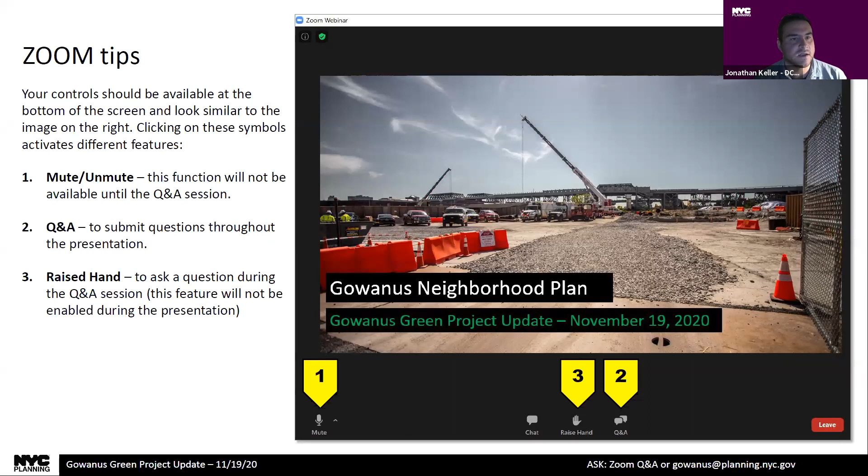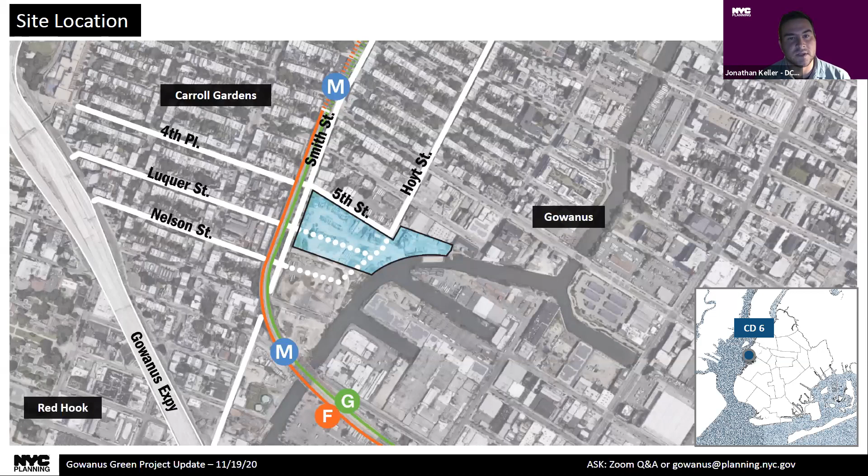Great, thank you, Councilmember Lander and Mike and CB6. So to get right into it, tonight we are here to talk to you about Gowanus Green, also known colloquially as Public Place. Tonight we will go over how the city has been planning for Gowanus Green, and then the development team will present on the specifics behind developing the site, including site plans and massing, project resiliency and sustainability, the proposed affordable housing plan, and some timing and next steps.

First up from the agency team is Mark McIntyre from the Office of Environmental Remediation, who will walk us through the history of contamination on the site and remediation updates. He'll be followed by colleagues at Housing Preservation and Development to talk about the project history, and they will then hand it back to me to talk through the plan components and the zoning proposal that we are putting forth that would facilitate this project.

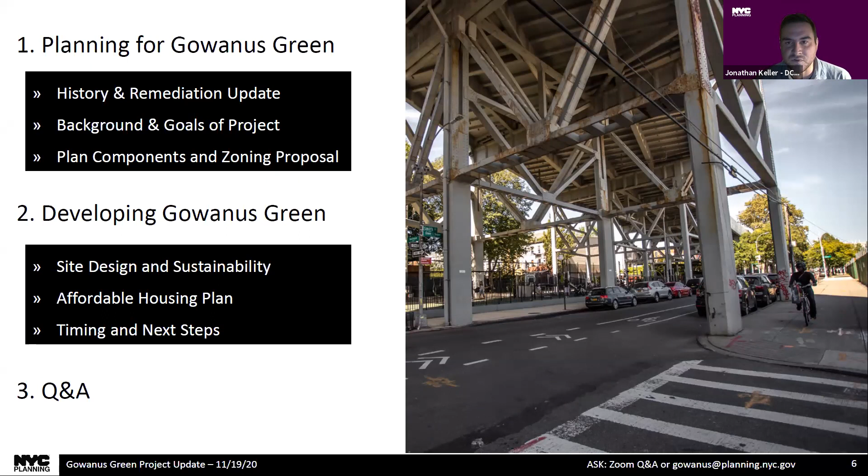Great. Thank you, Jonathan. Good evening. Our office runs the City Land Cleanup Program. Just as a bit of background, the Gowanus Canal and the path to its cleanup has understandably received a lot of attention over the past 10 years. Tonight, I want to spend a few minutes on the cleanup of the land, that is Public Place.

For decades, this city property has been seriously contaminated, and the contamination of the land has spread to the canal, causing the canal to be placed on the National Superfund list. But after 20 years of study and design, the land is now being cleaned up. This is a historic moment. After 160 years, this land will now be restored and made available for public and community use.

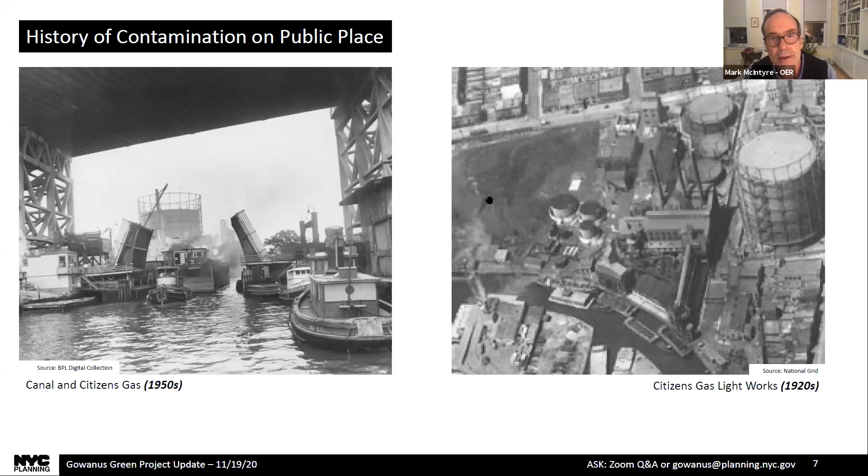A word on the remedy: it is a containment remedy. It will remove contamination to a depth of 22 feet. It will place a cover across the site and erect a barrier wall to keep coal tar from reaching the canal. This remedy protects public health and the environment by removing contamination and by boxing in contamination remaining beneath the site, preventing it from spreading further. This is a standard approach for remedies at former gas plant sites. Next slide, please.

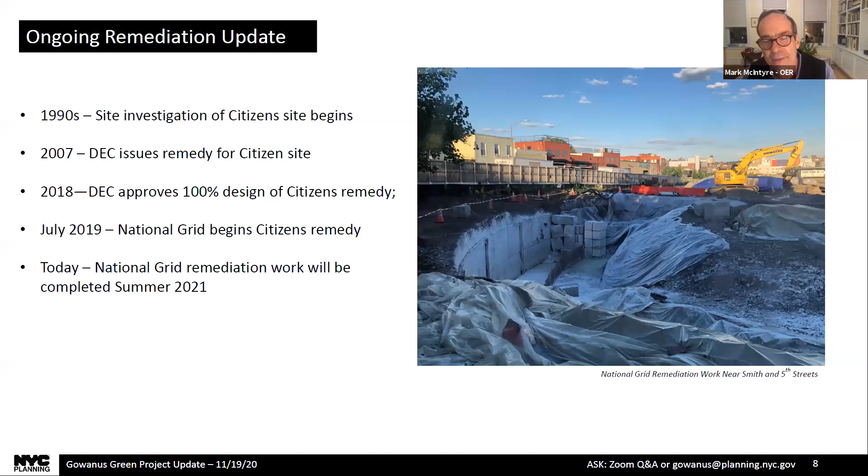So here are the remedy elements. A barrier wall, 880 feet long. It's absolutely critical to the success of the remedy. It keeps coal tar from reaching the canal, protecting the canal remedy for the long term.

There are recovery wells located uphill of the barrier wall to capture coal tar that mounds up against it. There'll be excavation of coal tar down at 22 feet. To date, 70,000 tons of contaminated soil have been removed, and removal will continue until the remedy is completed next summer.

There will be a cover built across the entire site. This will prevent any exposure to people who come to Public Place in the future. And there will be, importantly, what's known as a site management plan. This requires National Grid to maintain and monitor the barrier wall, the recovery wells, and the site cover to ensure their long-term effectiveness.

The state DEC will also use the site management plan to direct any further remediation of shallow soil at Public Place that may be necessary before the developer, Gowanus Green, builds on the site.

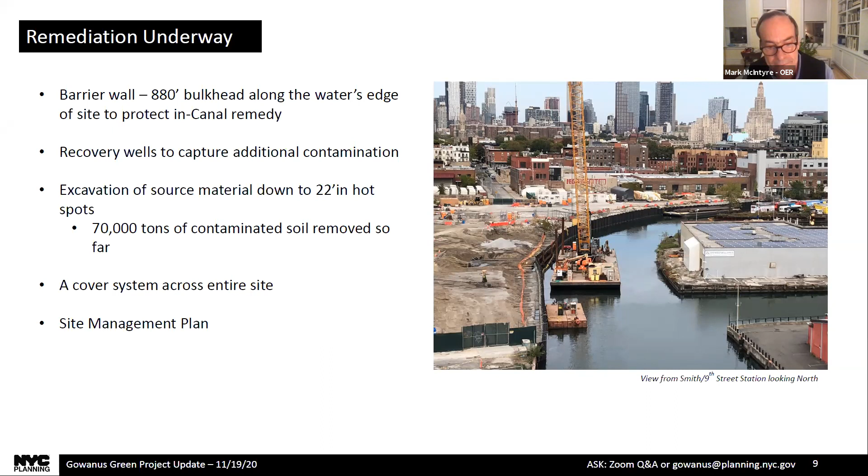So upon the rezoning of the Gowanus, the city will place environmental requirements on Public Place. This will require Gowanus Green to study the extent of soil contamination beneath the buildings it proposes to build. If the study shows further remediation is necessary, Gowanus Green must perform this work to the satisfaction of the city and the state before it can pull building permits.

To prepare for this work, Gowanus Green has asked the state DEC to make it a party to the brownfield cleanup agreement under which National Grid is now remediating the site.

After National Grid finishes constructing the remedy, Gowanus Green will study soil conditions at Public Place to satisfy the city environmental requirements. If the study shows further remediation is necessary, such as installation of a vapor control system beneath the buildings, Gowanus Green will have to complete this work to the satisfaction of the state and city before it can build and occupy buildings on Public Place.

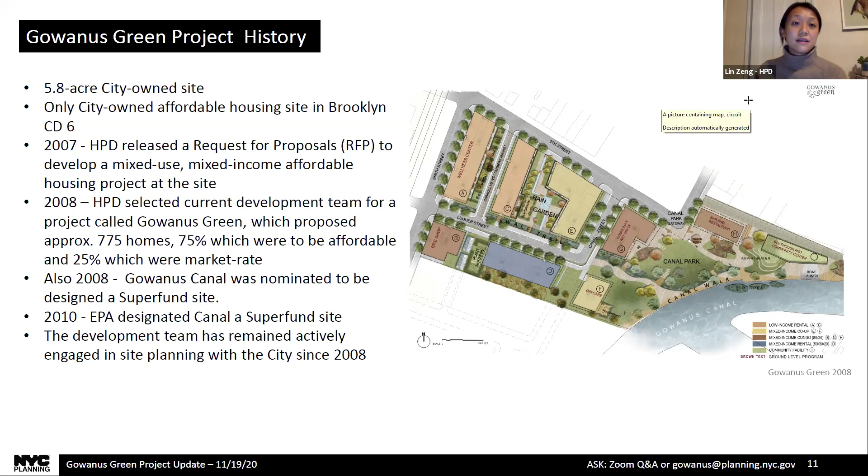The current plan also allocates space for a future 500-seat public school, which was not present in the original plan. Lastly, responding to the existing condition, this project will also include significant green infrastructure that will deal with stormwater management in a sustainable way.

Creating a sustainable, resilient, environmentally healthy community; supporting cleanup and remediation; creating and preserving affordable housing for all people, but especially those at the lowest income brackets; building a network of parks and open spaces in Gowanus; creating an inclusive neighborhood that is integrated and accessible for all; and supporting community and economic development for a thriving neighborhood.

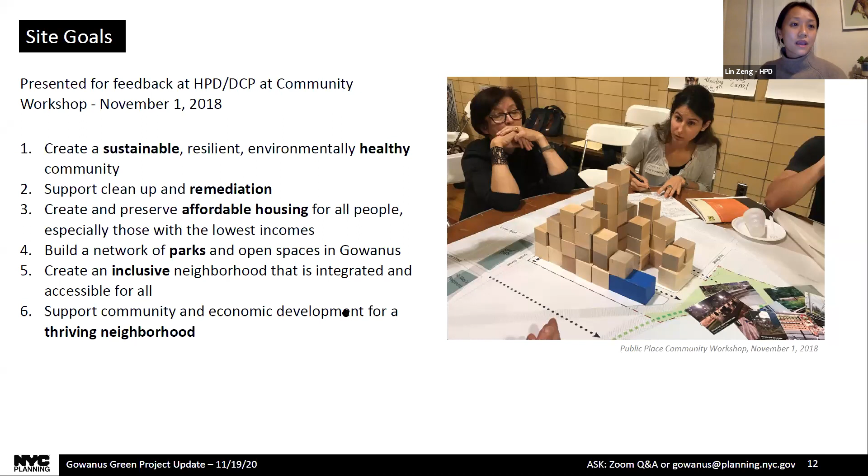So I'm going to shift gears a little bit and talk about affordable housing in general. What is affordable housing? This is often the question we get when we go to any community in the city with affordable housing projects. Affordable for whom? It is relative. Affordability is definitely relative, but the definition we're using is that affordable housing is when a household spends no more than a third of its income on rent and utilities.

Here I'm going to talk about AMI, another term that gets used quite a bit when explaining affordable housing. It stands for area median income, and it's something the federal government determines annually for different regions. The AMI number acts as an indicator based on household size and what income category you fall into. In 2020, the area median income, or AMI, for a family of 3 in the New York metro area is a little bit over $100,000. You might say that is pretty high - it is very high and actually rather high for households who are looking for and need affordable housing and can't afford it.

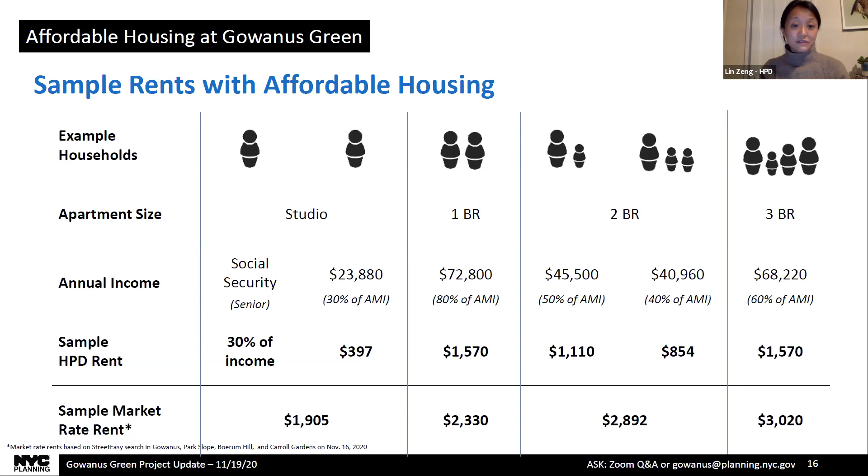Next slide. So the development team will discuss the proposed buildings at Gowanus Green in a lot more detail than I am right now. But I do want to end with a summary of the city's affordable housing goals. In addition to the mapped park, the allocation of space for a new public school, and new infrastructure, this project, Gowanus Green, will be 100% affordable.

It will serve New Yorkers with a wide range of incomes and needs. At least half of the rental housing will be dedicated to extremely low and very low income households—like that family of 3 making about $50,000 a year. At least 15% will also be dedicated to formerly homeless households. And we are also looking to include buildings dedicated to low-income seniors, as well as supportive housing with supportive services on site, and affordable home ownership as well.

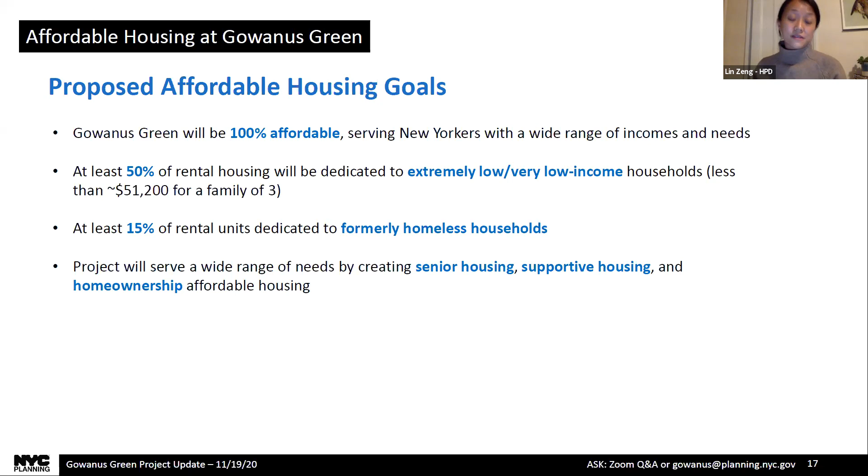So with that, I think I'm turning it over to Jonathan at DCP.

Yes, thank you. Back to me. I'm going to run through, hopefully very quickly, some slides about our plan components and the zoning proposal, since it is pretty important to how the development project will be facilitated. First, as there are probably a lot of people who are new to the entire process and study.

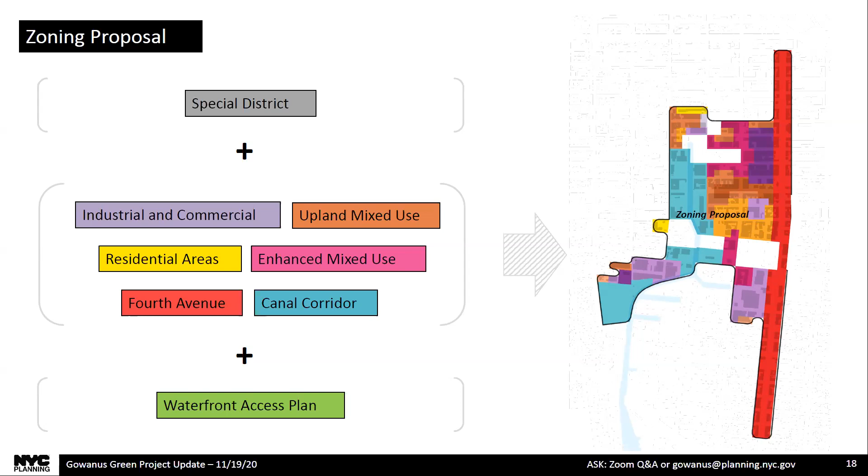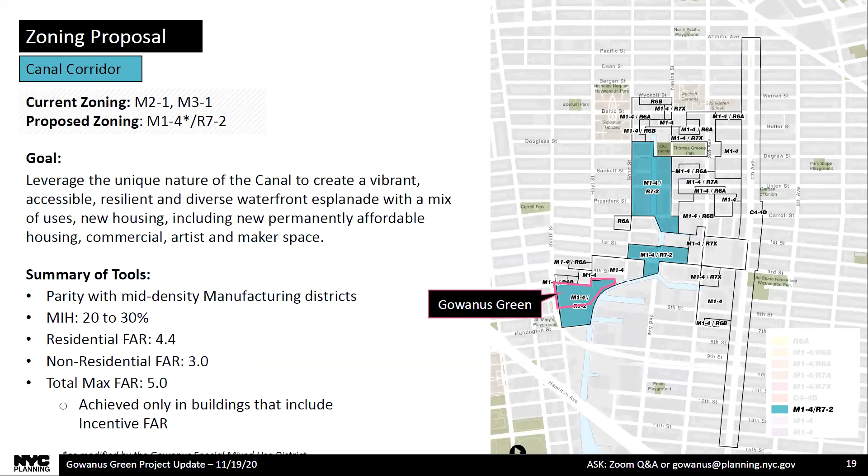We have been looking at an 80 block area for appropriate changes to zoning and land use. We've studied particularly and proposed specific zoning along the canal that responds to its unique conditions, to foster a vibrant, accessible, resilient, and active waterfront with a mix of uses—new housing, permanently affordable housing, and commercial artist and makerspace. A centerpiece of this vision, created over years of process and engagement with the community, is a waterfront access plan that will provide public open space along the canal.

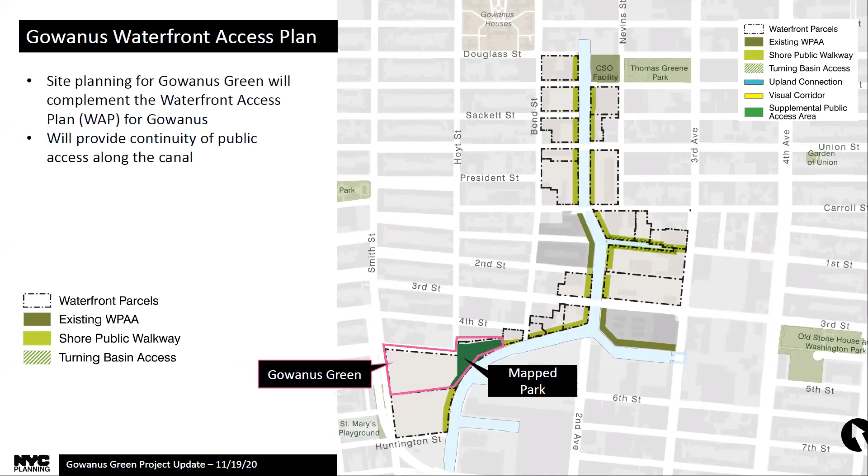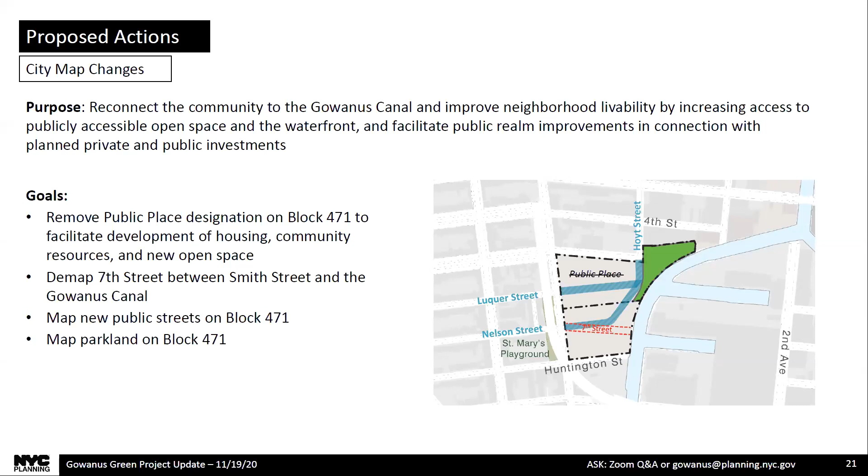And a key part of that waterfront access plan is Gowanus Green. As many people have mentioned, Gowanus Green is an extremely large site. It's also city owned, and that presents an enormous opportunity to really do some innovative site master planning. Some actions towards that master planning: first, we are de-designating the public place designation. This is necessary because public places do not allow housing to be built. At the same time, we are proposing new public streets to reconnect the community to the waterfront, and also a new public park.

Looking at this from a bird's eye view, Gowanus Green sits adjacent to the Culver elevated line that cuts the site off from the adjacent Carroll Gardens neighborhood. There's also a sewer easement that bifurcates the private site to the south and crosses the future public park.

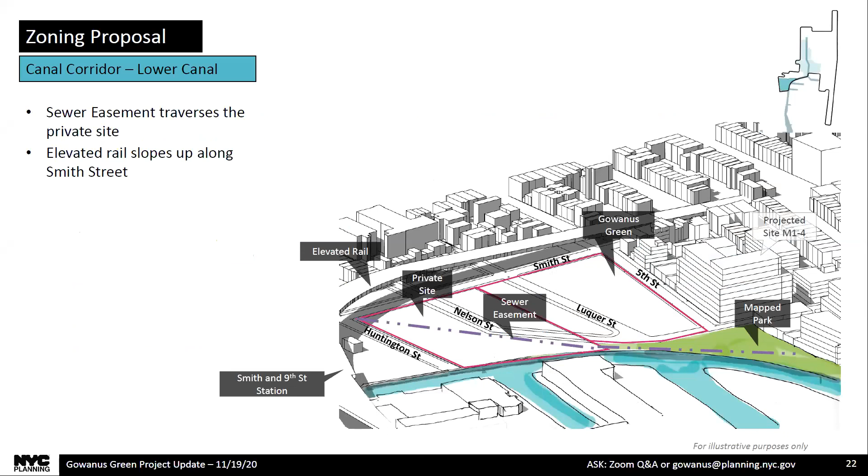The new streets, extensions of Hoyt, Luquer, and Nelson, will reconnect the community to the canal and improve neighborhood livability with better access to open space and the waterfront.

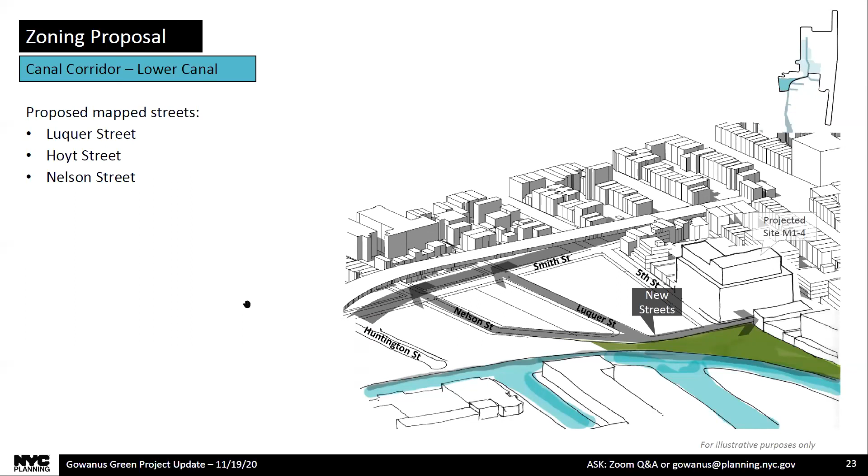When you put this all together, you start to see that we have a 1.5 acre mapped public park that will also go through its own community engagement and design process. This will occur in the future after the Gowanus plan is approved - that mapping application needs to be approved first. Currently, it's anticipated that the construction of that park will be overseen by the development team as part of the overall comprehensive remediation, site prep, and construction of the site and the project.

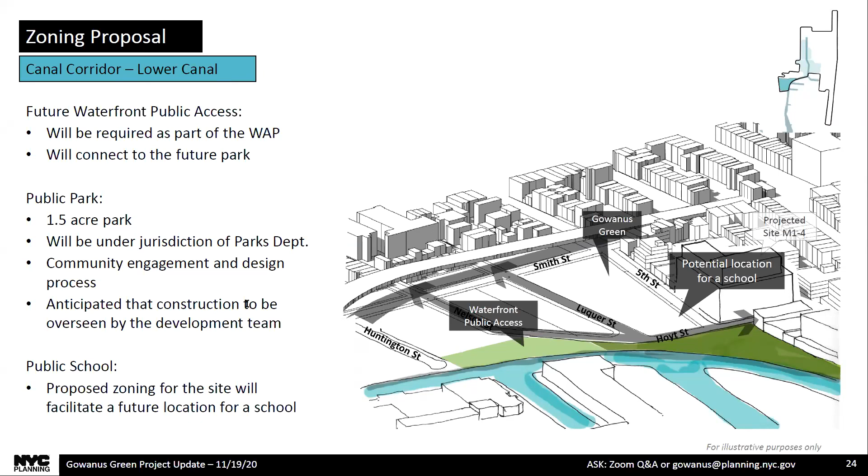Also, as mentioned a number of times, the plan and the zoning will help facilitate space for a future new public school on the site. Between the park, new streets, and the space for the school, you get a glimpse of the remaining space left for where the buildings can go. This is one of the reasons for the proposed heights and massings you will see - the space taken up by critical public infrastructure and key community facilities and open space means the remaining development is really squeezed up, if you will.

Another key principle we've kept in mind from the planning process and the community is also evident in this section, where we've kept in mind to shift the bulk and height away from the Carroll Gardens brownstones and away from the canal, to provide more openness, light, and air. This results in more height towards the middle of the site.

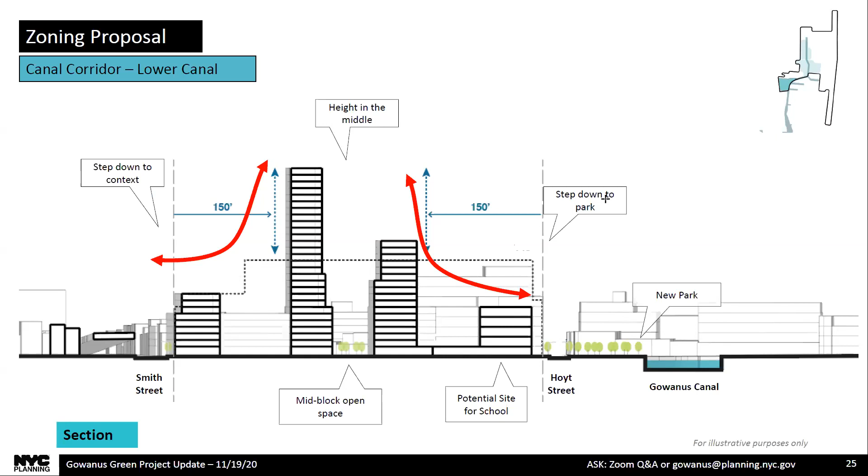And so with that, we'll hand it over to the development team who will go through specific elements of the development proposal.

Thanks, Jonathan. My name is Andrew Foley, Associate Director of Development at Jonathan Rose Companies, one of 4 partners of Gowanus Green. Our partnership includes my firm, Jonathan Rose Companies, Fifth Avenue Committee, Bluestone Organization, and Hudson Companies.

All 4 developers have been deeply committed to building affordable housing in this community for a very long time. So we are very excited to present updates to our plan, which we first embarked on, before my time, 12 years ago or more. We're excited at this moment.

The updates we'll take you through quickly will show that our project is building more affordable housing at deeper levels of affordability, more publicly accessible open space, providing a site for a future public school, and building a more resilient and sustainable project than what we proposed back in 2007.

So what we're going to do, we'll try to move quickly - we want to get to Q&A. We'll take you through some meaningful design updates, talk a bit about the open spaces, and get into resiliency and sustainability, particularly focusing on approaches to stormwater and wastewater. Then I'll turn it over to my colleague, Aaron Koffman at Hudson Companies, to take you through our affordable housing plan. Next slide.

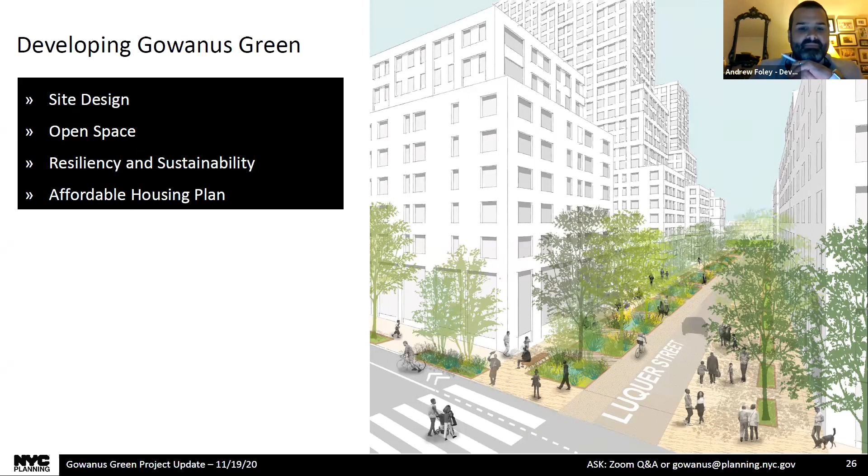So this is the updated site overview of our project. As you can see, 6 residential buildings labeled A through F, comprising about 950 units of 100% affordable housing. You can see that we've provided a roughly 24,000 square foot site for a future public school along Hoyt, adjacent to the future public park, which also provides some at-grade play space for the public school.

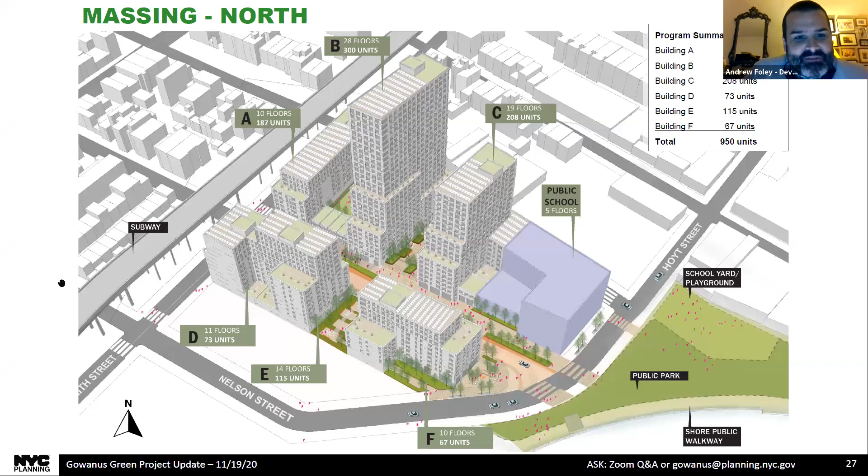One thing I just wanted to note is that you'll see in some of these design presentations, these are all very preliminary - not necessarily indicative of what the buildings will look like. These were massings just designed in sketches to give you a sense of our intent, and we'll be developing designs much further as we go, providing the community the opportunity to give us input on what the buildings will ultimately look like. But I think this gives you a good sense here. Next slide.

As Jonathan mentioned, from public input and thinking through the site with our design team at Marvel Architects, we zeroed in on a strategy of putting height in the middle of the site. That means keeping heights along Smith Street and 5th low, both to be respectful of the brownstones to the west, but also so a pedestrian walking down that active street doesn't feel like there's too much height loaded on that side. We also wanted to keep height away from the park to provide as much natural light to the future park.

We also realized that that was the right location for a future public school. So what you have here are buildings along Smith roughly 10 to 11 floors in total. On the other side of the site, a 5-story school with a 10-story building. The result is we try to push the height as far into the site as possible to minimize the impacts to our surrounding neighbors.

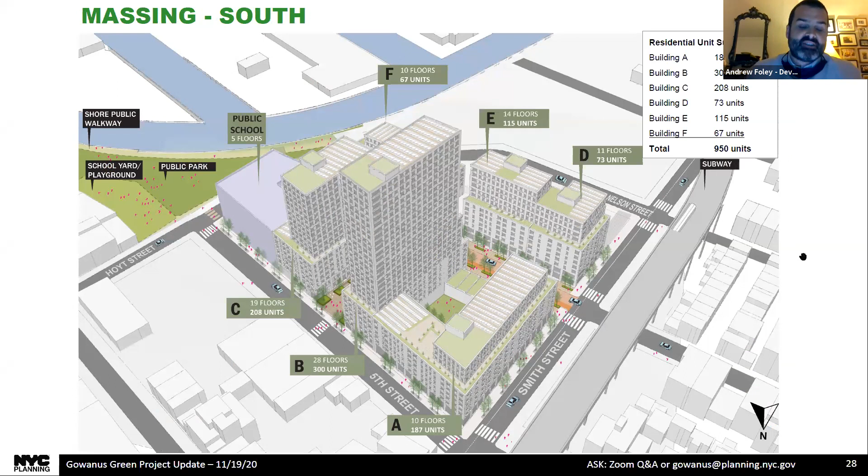Next, just one thing to back up one slide, if you wouldn't mind. Just one thing we wanted to highlight here too is our intent for these buildings to be incredibly resilient and sustainable. Our intent is to put solar panels on all of them, green roofs, and build the building envelopes to a passive house standard to be as energy efficient as possible.

Again, we envision a mix of healthcare uses, maybe some senior uses. We'd like to have an art use in there. We look forward to coming back to the community to get more input as these buildings progress on what types of uses you want to see.

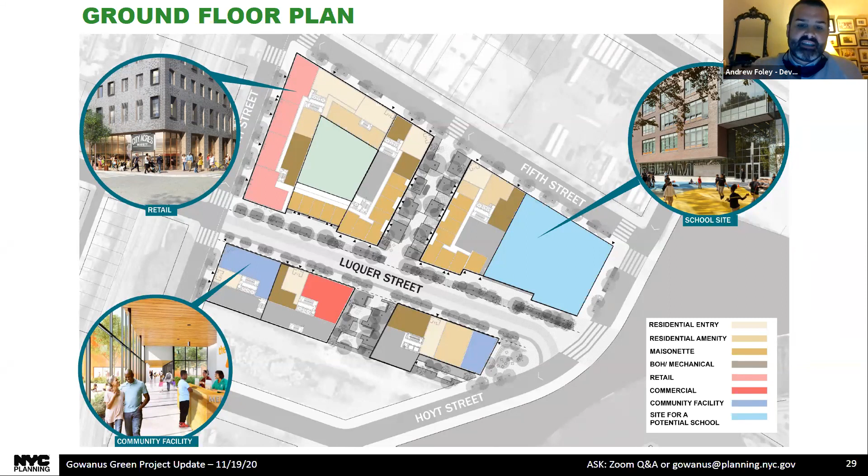North on Luquer, you'll see in light gray, light brown, maisonettes - residential ground floor units that help activate the street and build a sense of community. And then lastly, you'll see the site for the potential school here.

So this is our landscape site plan. We really wanted to align our project with the goals and principles outlined by the Gowanus Canal Conservancy through their lowlands plan. We admired that work and think there's some really good thinking in there. So we hired landscape architects who've been doing that work alongside the Gowanus Canal Conservancy, and you'll see here the result of the vision we put forward.

We strive to create a porous site that connects to the existing street grid and invites residents to come through our site through publicly accessible open space and visit this amazing park and shore public walkway.

So let me make sure I'm not forgetting anything. You'll see here a network of publicly accessible open spaces, defined by our shared street running through the site from Smith to Hoyt, then rain gardens dividing the site roughly at the midpoint as pedestrian-only passages, and a canal view plaza along the canal, which we'll talk a bit more about.

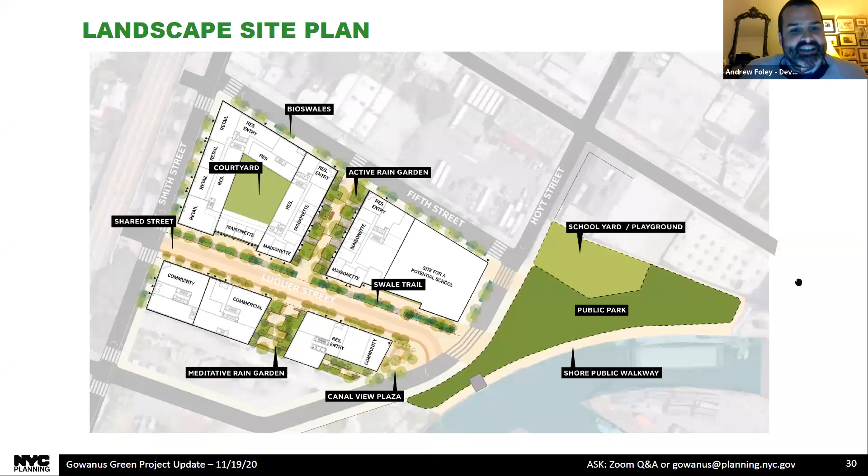So really, I think the central public space in our plan, aside from the public park, is the shared street. A shared street is basically a pedestrian-preferred street in which pedestrians, cyclists, and motorists all negotiate the public realm together.

I think in this moment of COVID that we're all living in, we've all learned that streets are public space, that we do a lot of living there. They're really important features to our cities. Shared streets are designed to generate that kind of social life that we see in great streets. European cities have been doing this for many years, benefiting from the great cultural exchange that happens when you just have people in the streets together.

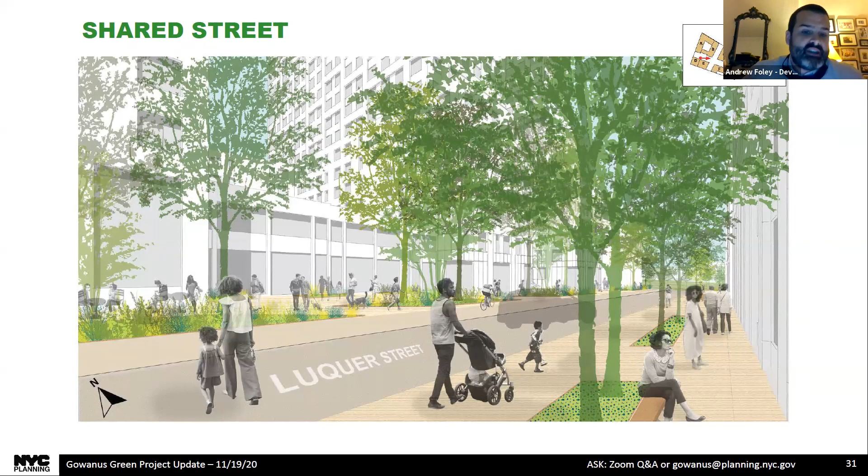The Dutch call it a woonerf, which roughly translated means a living yard. Our goal is to bring the first woonerf to the Gowanus neighborhood, and we think this is a great site to do it, particularly because there's not a lot of through traffic. This will be a single lane street, so we think it's a great opportunity to put pedestrians first here.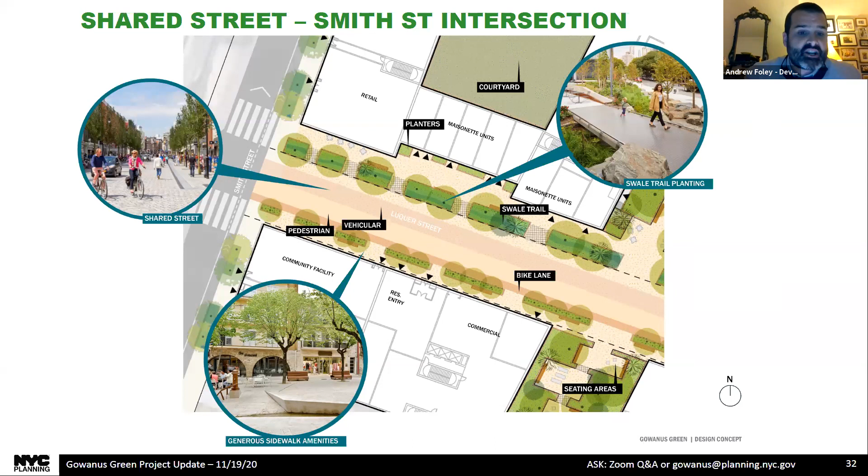This is calling out the intersection of Smith and our Luquer shared street. You can see here where vehicles, bikes, and pedestrians intersect. We're also showing protected spaces provided on the other side of planters, which provide some protection and room for ample seating.

Here's a section showing how we'd like to organize the street. You'll see that a portion of this street will be a mapped street, and then there's a section that shows our swale trail and sidewalk that'll be on the private side, which allows us to collect stormwater and run some private green infrastructure below, which I'll talk about in a moment.

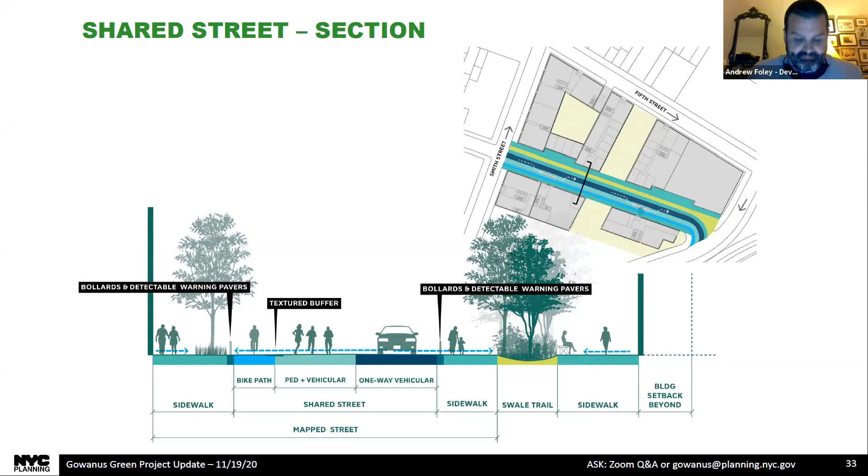This is a view looking south to the project from 5th Street. We're envisioning this being a pedestrian-only passageway through our project with a series of rain gardens. We'll show you those real quickly.

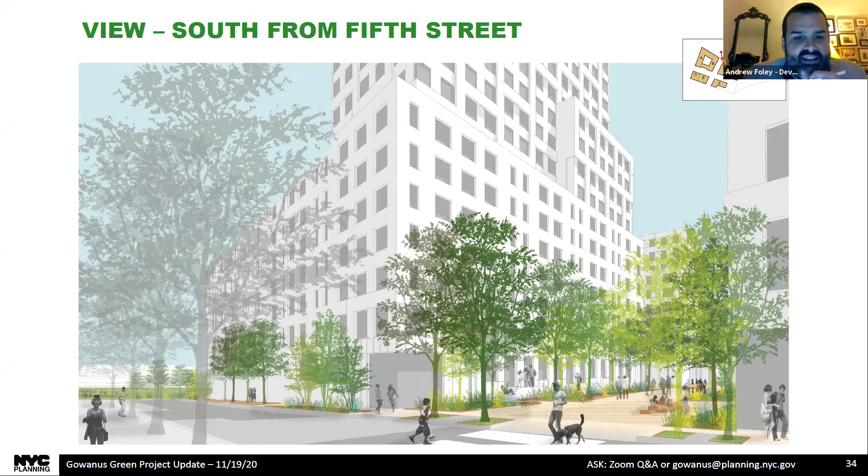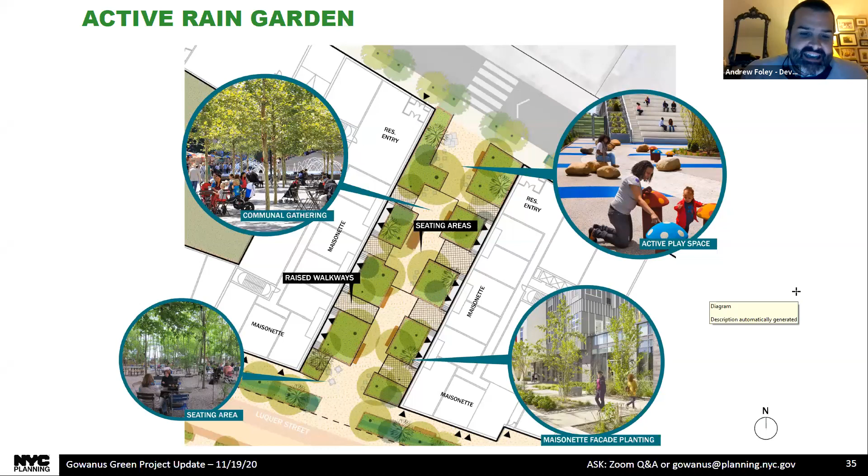A rain garden is basically a garden that uses the rain for irrigation and has a palette of plants that is adaptable to stormwater conditions. So this is a feature of our stormwater strategy, but also we're hoping to activate it with communal gathering spaces, seating areas, and places for active play. It will be a protected area without vehicle traffic, and our maisonettes will have a stoop-like feeling like many streets we enjoy walking down in New York.

South on Luquer, we're proposing another rain garden that will have a heavier garden feel and be geared more towards passive activities. We see it as a contemplative space, a place for meditation, yoga, with flexible informal seating—places that are not intended to be as active and potentially noisy as the one to the north on Luquer.

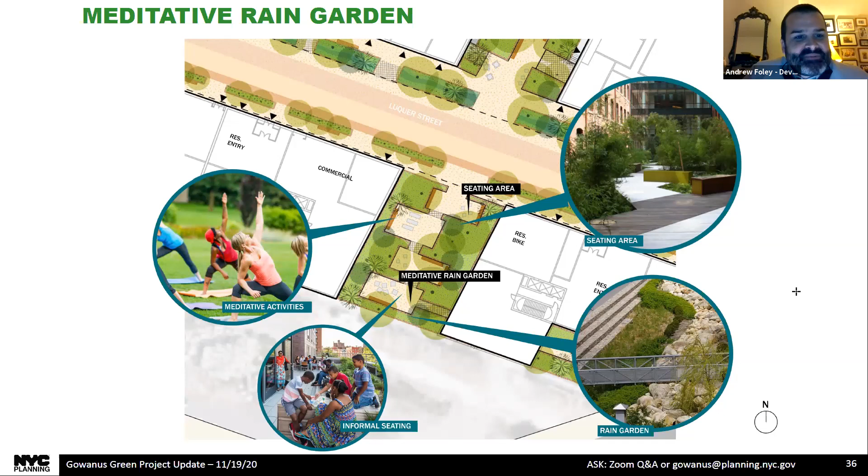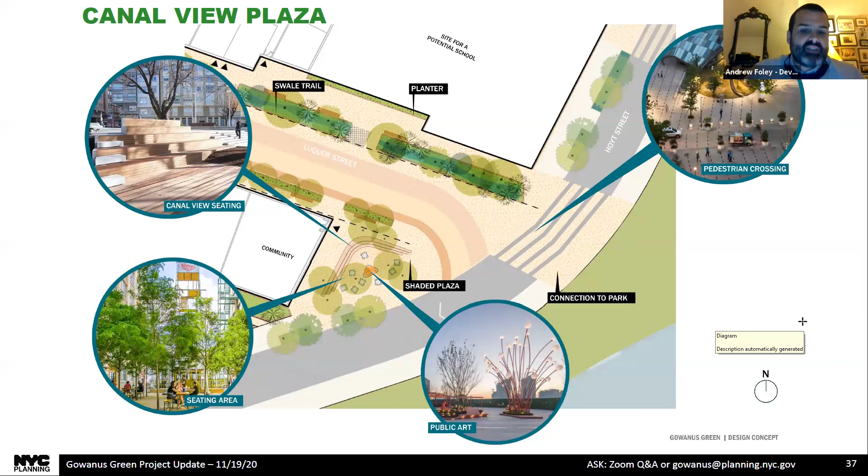Lastly, this Canal View Plaza—we think this is a really great moment. It's across from the park and will have a lot of activity coming from the Shore Public Walkway. We'd like to feature some great art here. We're big fans of the work the Gowanus Canal Conservancy has done to show how the canal and the lowland can be activated through art that reflects the history of the canal. It will also be adjacent to some community space that we'll be seeking community input on for programming at a future date. We think this could be a really great place to have an active community area.

So we've proposed to build our buildings to an elevation beyond the highest forecasted level in the design guidelines, which is the 2100 1% flood level. The design for the park is yet to start, and the Department of Parks will have to work through resiliency as well—how do we make the park resilient while connecting it to the Shore Public Walkway and to the water. More to come on that.

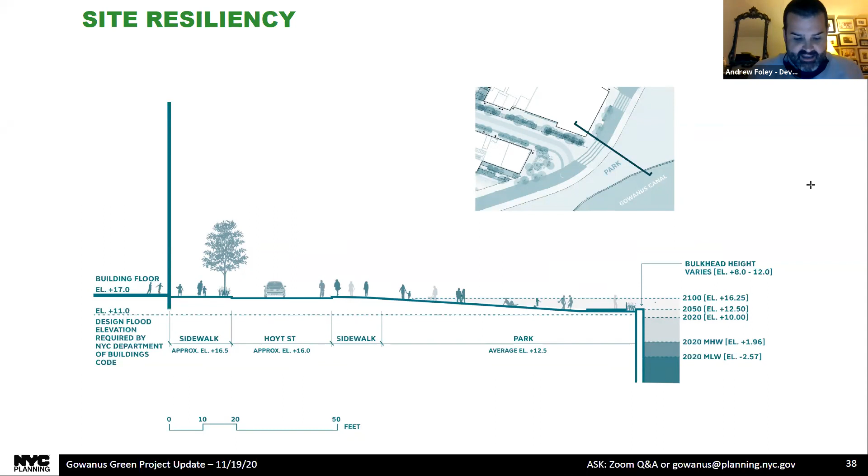Let's talk about CSOs, a topic we know is really important for the community, and one we care a lot about. We applaud the community's advocacy in ensuring this is addressed in the rezoning and in our project. We're early in this process—there's a big meeting in a couple weeks, and we know DEP, City Planning, and other agencies are working on a substantive update then.

We have not yet seen the environmental impact, so we're early in this. It's going to be a big part of what we do, but I wanted to highlight that as a development team, our goal is to make Gowanus Green a net zero development, including a net zero CSO development. So I want to talk through a few quick strategies on the stormwater side and the wastewater side.

On stormwater, our plan is to divert 100% of our stormwater away from the combined sewer, and we'll show you how we plan to approach that. Secondly, we plan to address not only the stormwater on our site but also additional roadway runoff around our site by installing bioswales around the perimeter of the project. On wastewater, we look to reduce wastewater through aggressive strategies on ultra low flow fixtures, water efficient appliances, and other controls that dramatically reduce our wastewater flow.

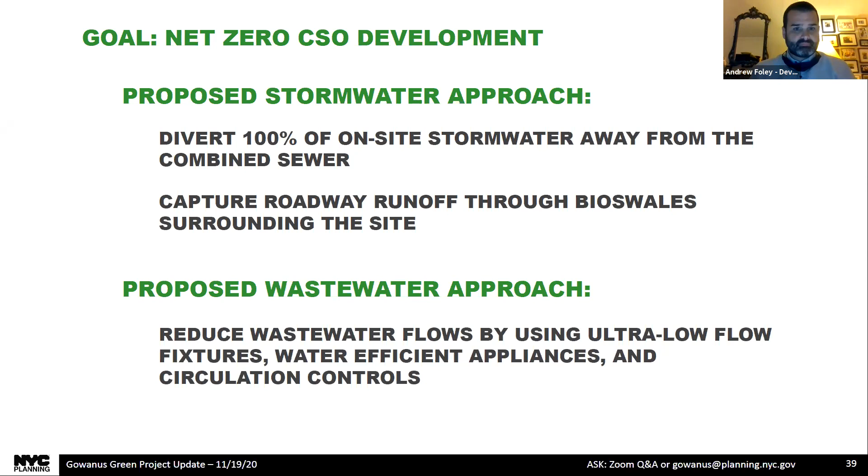To address our stormwater, our proposal is to install green infrastructure alongside Luquer that captures runoff in heavy rain events, because our green roofs and rain gardens will do a lot of the good work. In heavy rain events, we would have a perforated pipe that goes down the center of our site connected to a water quality unit, which would deposit clean water into the canal.

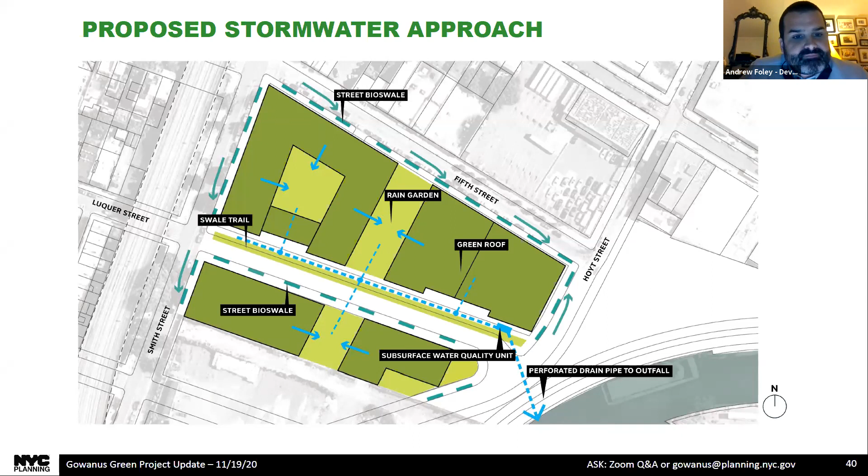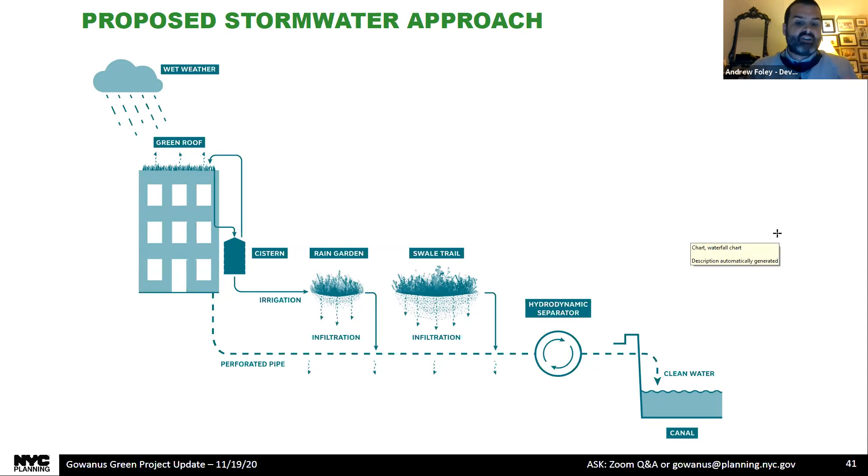Here's a graphic showing roughly how this works. During a heavy rain event, our green roof will absorb water. We'll collect water in cisterns to use for our rain gardens, and our swale trail will do a lot of work to capture and filter water. There's also a hydrodynamic separator, installed subsurface below ground, that helps clean the water, so in heavy events, when the water flows out into the canal, it flows out clean.

On wastewater, there are a range of measures we can take to dramatically reduce it. All four members of our team have a lot of experience doing this on our own projects to great success. It includes installing ultra low flow flush toilets, efficient fixtures, showers, and faucets. One thing we've found is that installing dishwashers in all of our residential units can cut water usage by 30%.

There are also circulation controls. When you turn on the shower, it usually takes a while to get to a comfortable temperature. These controls prevent the water from flowing until it heats up to your desired temperature, then let it start flowing. Those controls can also be applied to other sinks and faucets in your home, and that kind of savings can add up to significant reductions in wastewater flows.

More to come on that. We think these can be really effective strategies that not only we can do, but the whole neighborhood can adopt to reduce wastewater flows and help us achieve our goal.

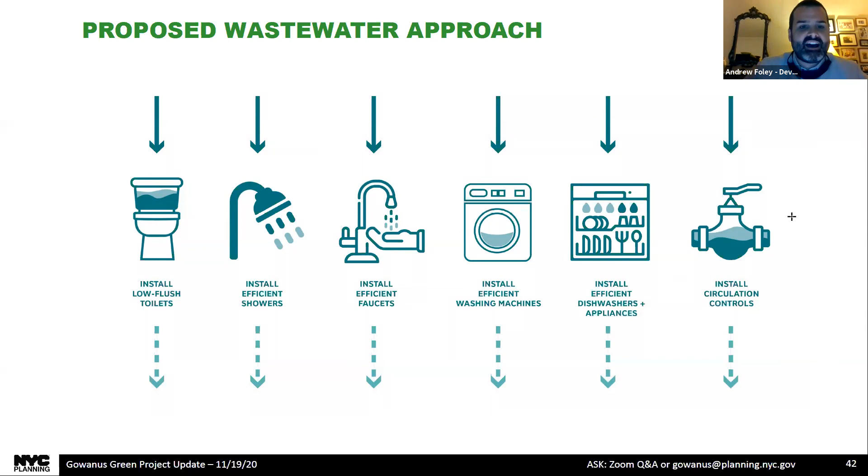With that, I'm going to turn it over to Aaron Koffman at Hudson Companies, who will take us through the affordable housing plan.

Thank you, Andrew. My name is Aaron Koffman. I'm a principal of the Hudson Companies and head of affordable housing, and I'm joined by my business partner Sally Gilliland, who runs design and has been working with me on this project. We're going to go through the affordable housing goals, our affordable housing plan, and briefly the affordable housing phasing.

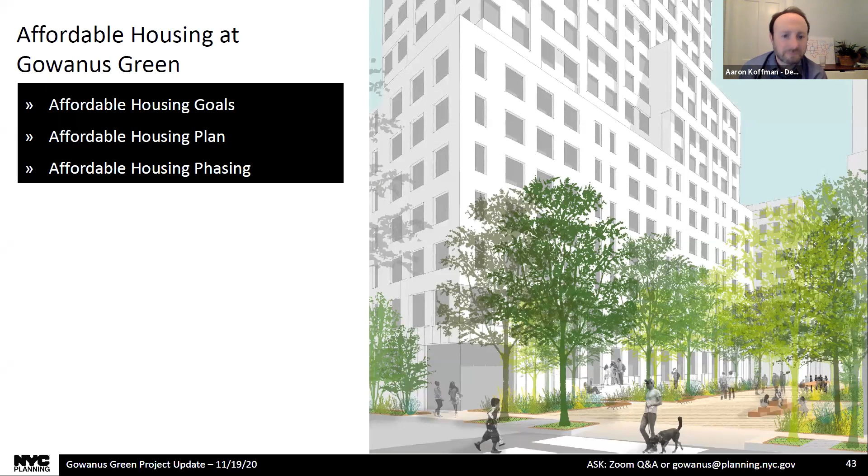As Councilman Lander led off, and as we've been saying, it will be 100% affordable, with 50% of the housing dedicated to households earning or averaging below 50% AMI. As Lynn mentioned, 50% AMI is roughly $51,000 for a family of 3, such as a single earner with 2 children. That equates to roughly a rent of $1,110 a month for a 2-bedroom apartment, and $1,270 for a 3-bedroom apartment.

15% of all rental units will be dedicated to formerly homeless households. No more than 40% of the rental housing will be for moderate income households between 80 and 120% AMI. Again, 80% AMI for a family of 3 is roughly $82,000, and 120% AMI is around $122,000.

Just to give you an idea, those rents for a 2-bedroom start around $1,870 a month in 2020 terms. Obviously we're not closing in 2020, but that's the only data we have. But that just gives you an idea of what the affordability will be.

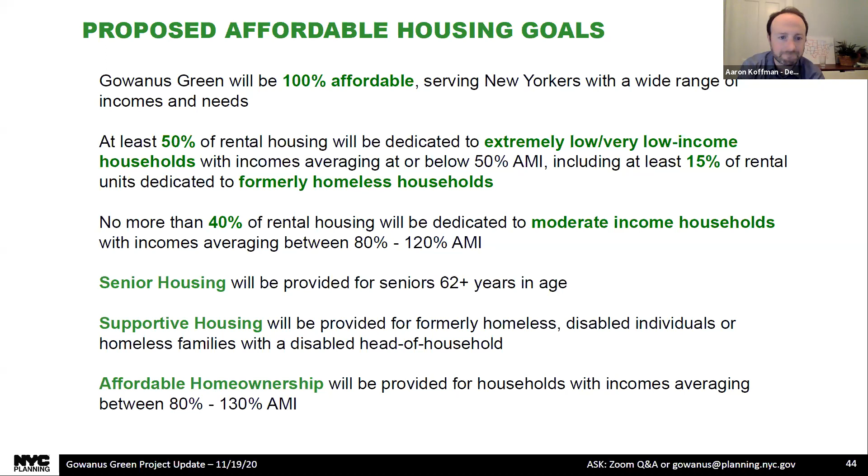Next slide. So you can see our housing plan. Again, we have 950 units working our way from Smith Street East. We're looking to bring in, on the Smith Street side, roughly 260 apartments, again with a mix of incomes and permanently supportive housing. And then we will move to the taller buildings as we go down towards the water. We'll talk about that in a second. It just gives you an idea of where the units are going. The home ownership will be in its own building, that's building F. You can see there at the southeast corner near the Hoyt Street extension, closer to the park and the water. Next slide.

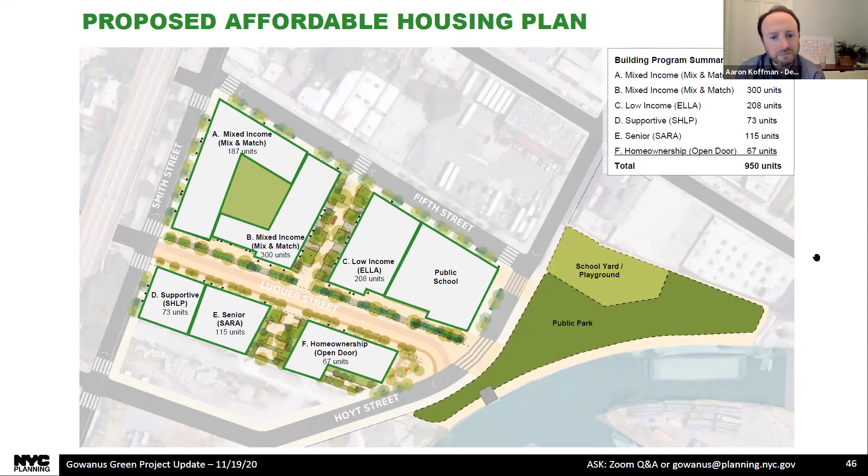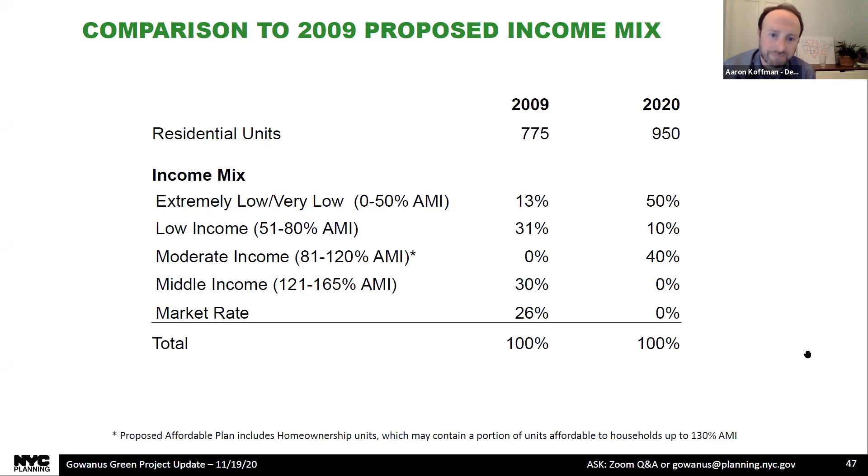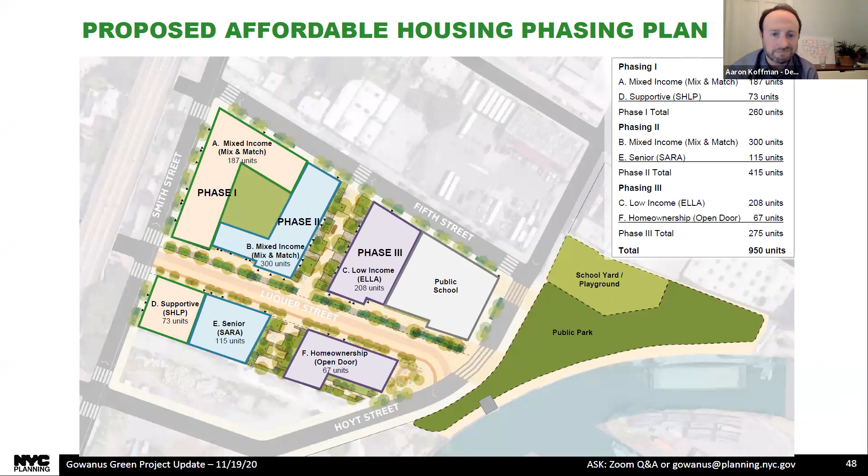And I believe that might be our last slide. Next slide, I think. Oh, that is correct. And we're going to jump right into the Q&A.